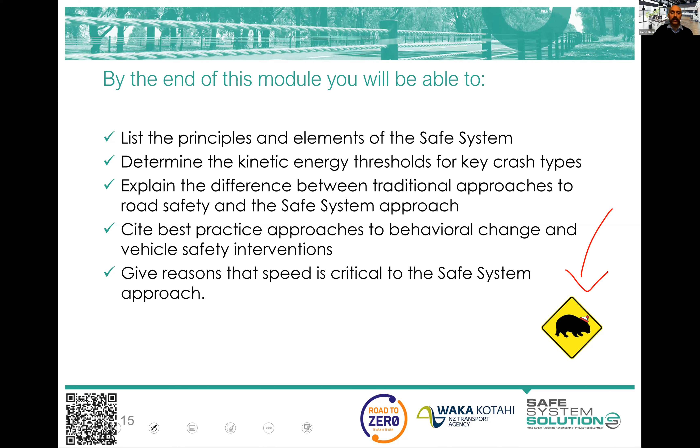Now, many of you know your Road to Zero document, New Zealand's Road Safety Strategy 2020 to 2030. And it's a really good document. It's been well thought through. It's certainly got some world-leading stuff in there. And I'm not going to go through it. That's not the point of this course. But I did want to pull out just a couple of things in the KPI section of this, which I've got a few things relevant to this course. KPIs are associated with this document.

Percentage of people who have completed an approved safe system training course and showed improved understanding of the safe system. So that's a wonderful start, considering this course does that. It is an approved course. But the next one is interesting, where it talks about the percentage of road infrastructure projects that have been subject to a road safety audit and or safe system assessment. Because I'm tipping quite a few of you are very familiar with road safety auditing. Some of you are road safety auditors and do road safety audits. Some of you commission road safety audits.

Safe system assessments are a newer methodology for assessing road safety and alignment with safe system principles. And there is some overlap between safe system assessments and road safety audits, certainly, but they are different things and they have different purposes and they produce different results. It's one of the most common questions or misunderstandings of a safe system assessment, that it is just a road safety audit rebranded. And that is certainly not the case. As I say, they're trying to achieve the same sort of end objective of reducing death and serious injury. However, they go about it very different ways. They produce very different outputs and they're used for different purposes.

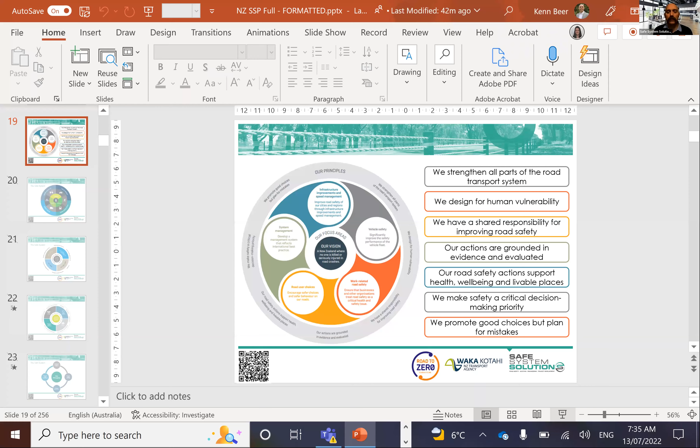Oh, wow. Okay, I see where we. Okay. Sorry, bear with me. So people ready to do their quiz? Absolutely. Wonderful. Okay. So if I just now reclaim this. And go back to here. Is that about where we were? It's coming. There it is. Great. Okay. So I'll continue on, and hopefully that lasts for a little bit longer this time.

I was just saying we promote good choices but plan for mistakes, which is that understanding of human fallibility. It's not to say we can't do better as humans in the road using task. It's just understanding our limitations as humans. Now, let me just jump out of the road space and jump into another industry, just to look at safety culture very briefly.

And if we look at widget production, like manufacturing something, making something, we saw back in the day there was a very pathological safety culture there, where it was a dangerous environment. People were told it was dangerous. They were given some training on how to use the machines or clean the machines or do their tasks. But they were just told, you have a responsibility to protect yourself. And that's what we refer to generally as a pathological safety culture in any sort of industry or any environment, where there is a dangerous system and its end responsibility is pushed to the individual.

You elevate from that to a reactive safety culture. And that's where in the widget production environment, the machines that keep killing people, crushing people, ripping arms off and the like are identified and the guards put on it, or a changed process is put in place. So it's a reactive safety culture. Then it elevates to this calculating safety culture. And that's where the economists get involved.

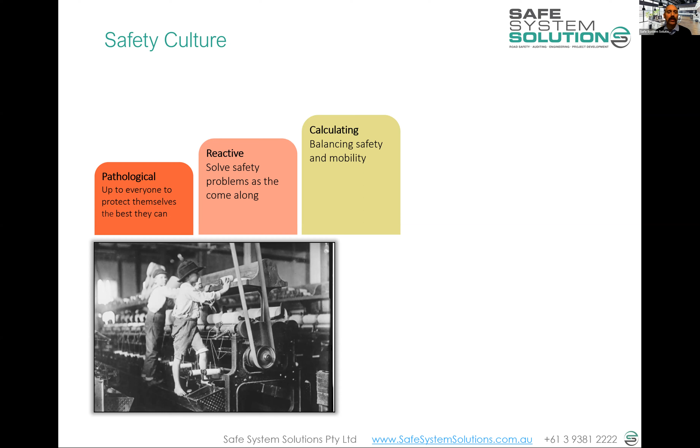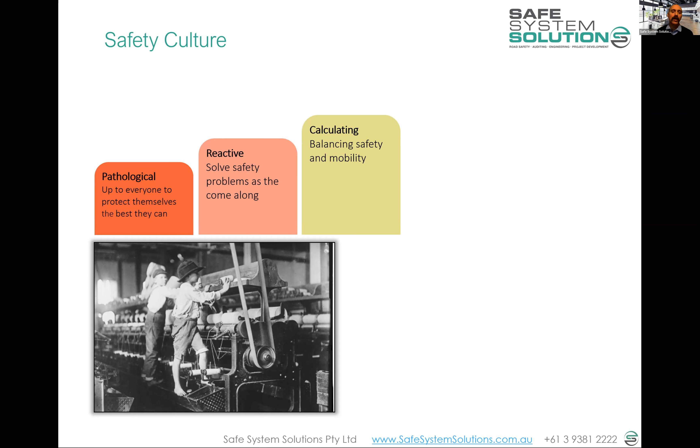And they start to say, sort of proactively and reactively, if we invested £30,000 in upgrades to safety of these machines and these areas and the loading docks and the like, we will actually see £90,000 in return in terms of increased widget production and less payouts to these families of crushed workers. And back then we came up with this thing called a benefit cost ratio, and you get a benefit cost ratio of 3. So every pound you invest, you get £3 in return for doing these safety improvements. And that's what we call a calculating safety culture.

But where we are moving to in the safe system safety culture is this proactive. And that's where you have to have a very high level of safety, and you can produce widgets up to whatever amount you can within that safety envelope. So the safety sets the precondition for widget production. And then you heavily need to invest in maintaining that safety culture. And that's not just maintaining machines and infrastructure, that's maintaining the actual culture itself.

So you've no doubt already aligned this to the road environment and road transport. And where do we sit? Well, we kind of straddle a few of these. We have very pathological elements to our road transport system where we know it's dangerous. We issue licenses to young people and we tell them it's their responsibility to be safe out there. And they have a responsibility, but we are pushing them out into a highly dangerous situation.

We do a lot of reactive stuff, addressing particular areas where crashes have occurred, death and serious injury have occurred. We calculate a lot. BCRs are very prevalent, and we do some exciting proactive stuff. And we're seeing some more emergence of proactive, and we want to see a lot more of that, where we're not waiting for crashes to happen. We understand risk, we understand biomechanics, we understand where crashes will occur in the future. We understand systemic risk, and we try to address that and then continue to try to maintain that culture and the infrastructure.

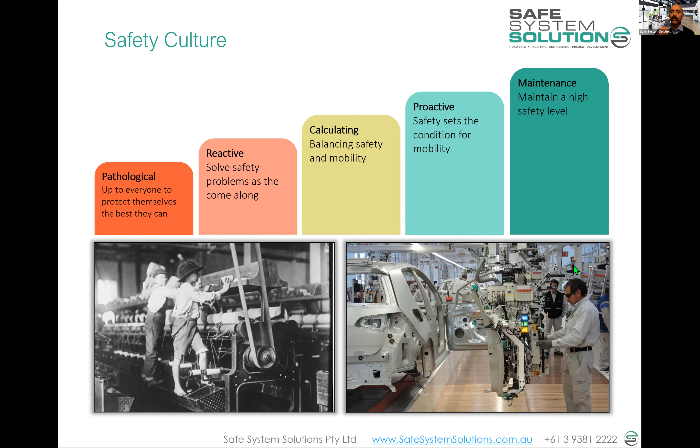I think it's time for a little quiz, Kathy, a little poll. Remember, people aren't being marked on this, but I wonder if we do have any polls loaded, or am I just going to ask it? People can type in. Oh no, look at that. It should have popped up on your screen, hopefully. Now, I've gone with these sort of generic key principles, and they're not worded in exactly the same way as we talked about in the New Zealand one, but it's a good discussion point. And the second question I haven't talked about at all, unless you've come to some of my other courses, the road safety audit course. I actually use it in a variety of courses, barrier design and a few other things. But have a go at those two questions. You're not being marked on them. We'll give you a minute. You can have a stretch as well if you want. We do have a bit longer break coming shortly. I don't want to spend too long on this, but let you have a look at that.

Will the next break be when you get the blue screen of death again, Kenn? I reckon we should schedule it in for there. It's a good time. Yeah. Wonder why we got the... I'll have to talk to our lovely IT person as to that one, because I don't think it was an internet issue. Bonus.

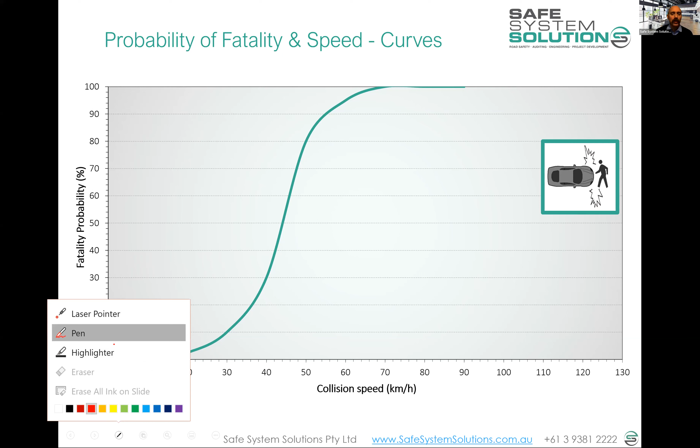So what are some of those sort of forces and speeds that we can handle? And you can see here a diagram of collision speed down the bottom. So that's the speed of impact. That is not the speed limit. Take that out of your mind for now. We're talking about the actual physics of this. So we've got a collision speed, and over here we've got the chance that collision will result in death to any member of our community. So this is based on whole population, and this is for a vehicle striking a pedestrian.

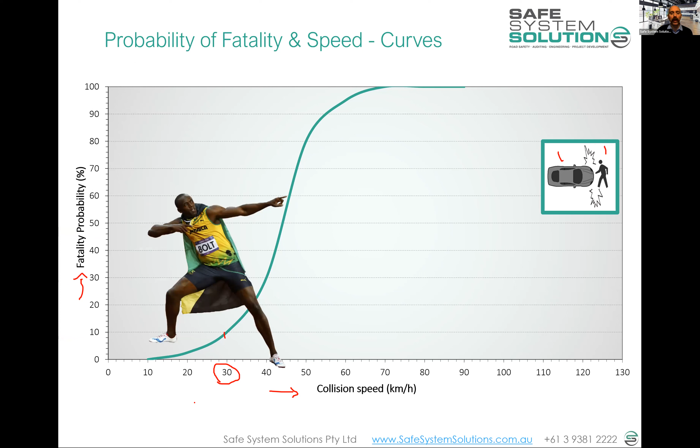And so we'll have old people in this. We'll have Usain Bolt type people. We'll have young people and everything like that. But you see there around that sort of 30 kilometer per hour mark is where things start to go really bad really quickly. Small increases after that become really quite bad. Usain Bolt is sort of up the curve because of his stature, his strength and the like, and his ability to withstand force, but we have that whole population there.

We have this information for other crash types, though, not just cars hitting pedestrians and cyclists and the like. We have it for others. Oh, of course, I don't know if this will stream, but just showing you the forces we are designed to handle. He broke a couple of ribs, but he came back and won the gold medal the next year. So, very recoverable and survivable. It's what we're designed for.

You can tell me later if that's streamed or not. You actually saw it.

Okay, so we have this for different crash types. And this, as I said, is a critical parameter for us in our thinking. We have this for right angle crashes. And this is where we have the speed of the bullet vehicle. And we call that the bullet vehicle in road safety. It's the vehicle that does the damage. It does the striking. This would be the target vehicle in a crash scenario down here.

This is the target vehicle. So bullet vehicle speed down the bottom, the collision speed, and the occupant of the target vehicle being the one that will be killed, and a driver side strike there or a passenger side.

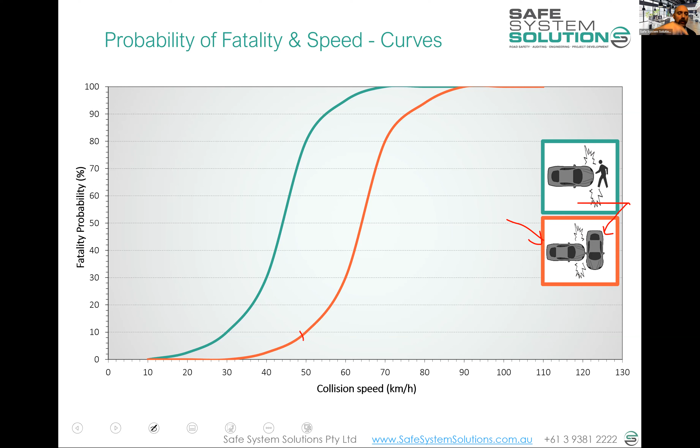And what we see there is the really critical point of kick up, the exponential point, is around that 50 kilometers per hour for bullet vehicle speed. And we have this for head-on crashes as well. And the critical point in the head-on crashes is around 70 kilometers per hour, which is 70 kilometers for each vehicle, the speed of each vehicle. So you'd have a closing speed, I suppose, in that scenario of 140 kilometers an hour.

But the actual crash forces on the occupant is a 70 kilometer per hour crash because, assuming same mass vehicle, same speed and a direct strike, the vehicle occupant goes from 70 kilometers per hour down to zero very quickly, and that's where the damage is done. It's the equivalent of running into a brick wall at 70 kilometers per hour.

So people have questioned the physics of that in past courses. So I did discover a Mythbusters episode where they did exactly that. They crashed cars into each other and then into brick walls and put accelerometers into the vehicles, as they do, in wonderfully spectacular fashion. So we could probably dig that out, or at least you could Google that and find it, no doubt.

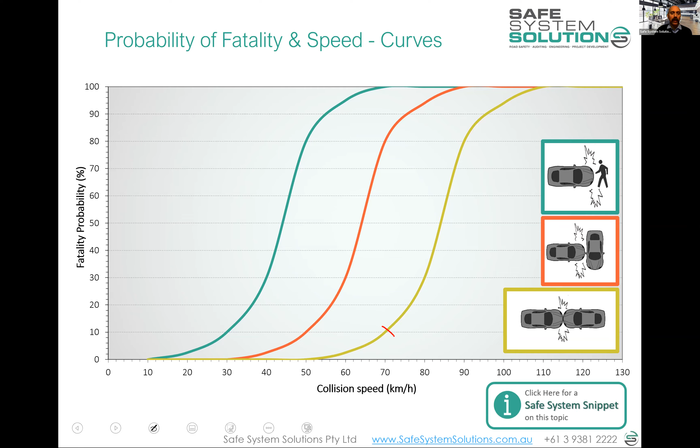So that becomes interesting. We're starting to build an understanding of crashes, forces, speeds, and these are becoming important parameters in our thinking. And of course, there are a huge number of crashes that can happen out there on the road network. So we just showed 3. This diagram we've produced, and I was doing the update to the Austroads Guide to Road Safety, Part 6, which is road safety audit, and I popped a variation of this diagram in there, because I think it's important that we start to get our head around this.

But we've started to do crash types, crash speed, and then a bit of a scale to show you the severity levels we're expecting from that crash type with different vehicles and the speeds. Now, in a safe system assessment, and we'll get to this in the 3rd module or so, you need to score the severity of a crash that you are predicting. So you've got to be able to look at an area or a design, predict a crash that will happen, think about the vehicles involved, the road users involved, the speeds, the angles that it'll happen at, and then you need to score it between 0 and 4.

And this is a bit of a guidance sheet for you to help you do that. So we will come back to this. We'll use it a lot. But I just want to show you a couple of things. One is that it's a spectrum. It's not a very hard line. We've tried to blur these because there is a blur in them.

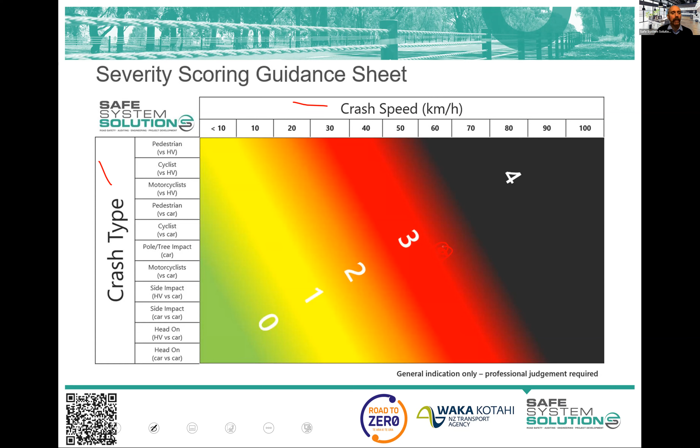Kathy, any questions for me at this stage before I jump onto this one? No, we had a calculation. Momentum equals weight times speed change. Human weight is less than a vehicle's weight, I think. I'm not good with my calculations.

Okay, I think I know where that might be going, and it's talking about the difference between a car hitting you and you hitting a car, which is fair. Yes, the specifics of the physics, and my analogy is there to give an image of this in something people can relate to. There are slight physics specifics to it. So well done. Give that person a prize for being a physicist in their spare time, or maybe that is their profession.

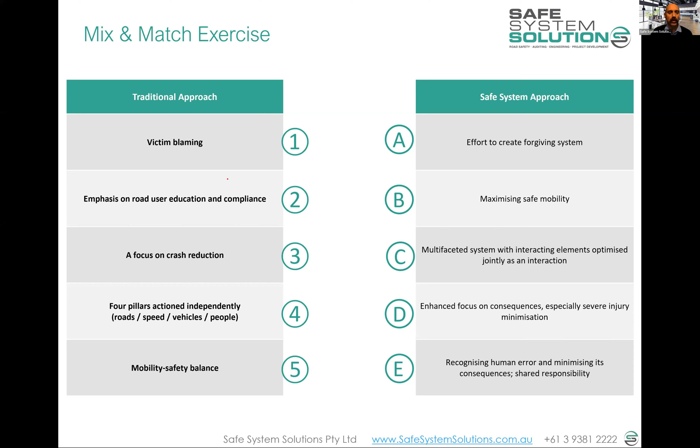Okay, let's have a quick look at this. I'm not going to spend long on it. Thank you for your input. As I say, a few of these could go to different places, so don't be too concerned if you maybe went another one. Kathy, maybe you can stop sharing that, and I'll do that on the screen because it'll be easier to follow. This was again taken from some Austroads work, so don't get too stressed.

So the idea of victim blaming, we don't want to be doing that anymore, looking for blame and then just saying, well, people need to not fall asleep when they drive or the like. We know looking at recognizing error, minimizing its consequence, and then having a more shared responsibility way of thinking about those issues. Emphasis on road user education and compliance is not to say we will ignore that. It's that effort to create that forgiving system is becoming more of a focus. We will continue to work on getting more out of the road user, but its limitations are there. So that one really could have gone to a few of those.

So the idea of crash reduction, to that enhanced focus on consequence, especially severe injury minimization, that goes back to what I said earlier on, is that it's not trying to eliminate all crashes. I mean, we would love to do that, but we just know that human error is part of what happens. So thinking about the physics of that.

So this idea of 4 pillars, actioned independently of roads and speeds and vehicles and people. Well, no, we're into a multifaceted system with interacting elements optimized jointly as an interaction. That's quite a mouthful of a statement. But it does indicate that these are not silos. They're not isolated things operating in their own entity. This is quite a system we're working with.

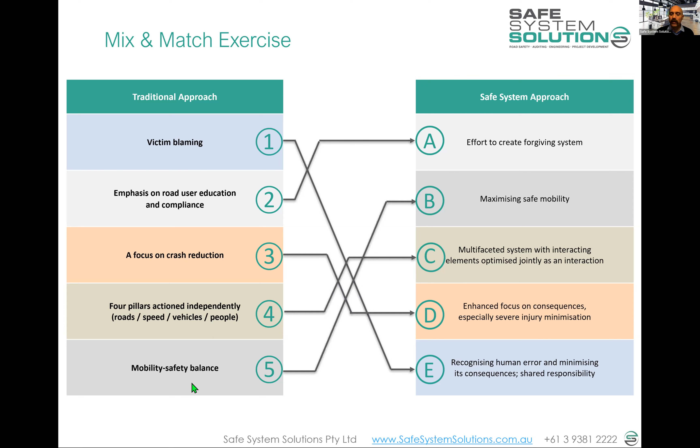And mobility safety balance, so getting that trade-off where you kill an acceptable number of New Zealanders and seriously injure an acceptable number to move things around, to say, well, no, we need safety, and we will move people and goods around within that safety envelope. It's not to say that the safe system is about stopping movement of people and goods, because, sure, we can have a safe system in New Zealand as long as nobody moves anywhere and no goods move anywhere. That's going to be very safe, but it defies the whole reason for a transport system. So we want a transport system that operates, and our objective is to ensure that happens in a safe manner.

I like the way Ian Cameron, who is a Western Australian actually, made this statement on a UN stage. We need a paradigm shift in road safety policy to stop the road death epidemic, and we need it now. It's unrealistic to expect that education and enforcement alone will bring the needed step change. Even road users who know and follow the rules make mistakes. A safe system creates an environment in which simple mistakes will no longer kill people or seriously injure people.

Education and enforcement tend to be the go-to for most people in road safety, and we know that they are elements of what can be done, but they're often the least effective in the way we do them. I'm not saying that we're going to reduce the amount of that or that it's not important. It just needs to be thought of in its particular way.

Let's do a little exercise here, and we'll jump into some infrastructure, and then we'll jump away from it again. This is a road that was getting a central barrier system job in a narrow flush median. You can see it there. Just a newly constructed photo here, and you're seeing some of this roll out in New Zealand now, so you'll be quite familiar with it if you're out and about in the regional network.

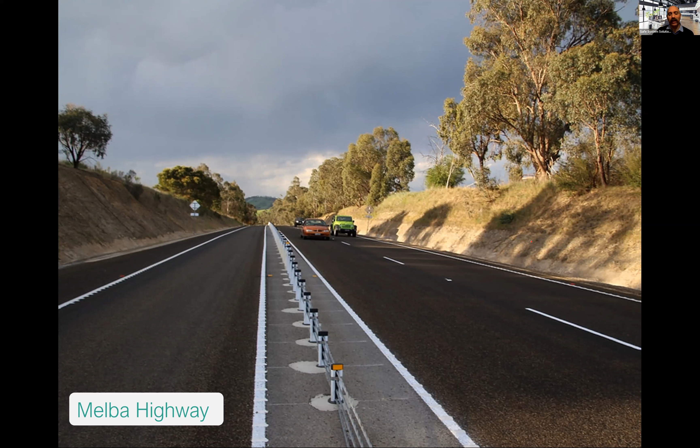We need to do stuff that is different to the way we've always been doing stuff out there on the road network in order for us to make significant gains in our road safety objectives. Sometimes it's just we need more money and we need more contractors and we need more resources just to get stuff out there we know works. But sometimes we need to innovate. And road safety audits play an important role in innovation and risk management, but they're not going to help us in that sense of getting things through the way a safe system assessment does.

So that's more of the job. That one got hit. Of course it got hit. I mean, some of the blockers were the maintenance people saying, well, it's going to get hit all the time. We have to maintain it. We've got occupational health and safety issues in maintaining it. How do we maintain the pavement next to it? We can't contraflow vehicles. What's happening? These are all things that we need to work through, and we need to come up with ways to address those and ensure that these things can happen safely. And they're very important. However, we need to remember the importance of it.

And this one, when it got hit, one of the people involved in the crash called the region just to say thank you for putting the barrier system in, which is pretty rare in our space, isn't it? That somebody just wants to say, hey, thanks for that. It probably saved my life because somebody came directly at me and the barrier was there. Anyway, they created a little video of this. So that's in the learning management system in the little resources section. It's just a 2-minute video, but to me, it's a really powerful one to talk about the way that infrastructure can

create this safe system. Because somebody fell asleep, they made a mistake. They left the road, they went straight at another vehicle, and the system stepped in. So the mistake happened, okay? And these are not bad people making these mistakes, right? They've made a poor judgment call in driving after a long weekend or whatever it was.

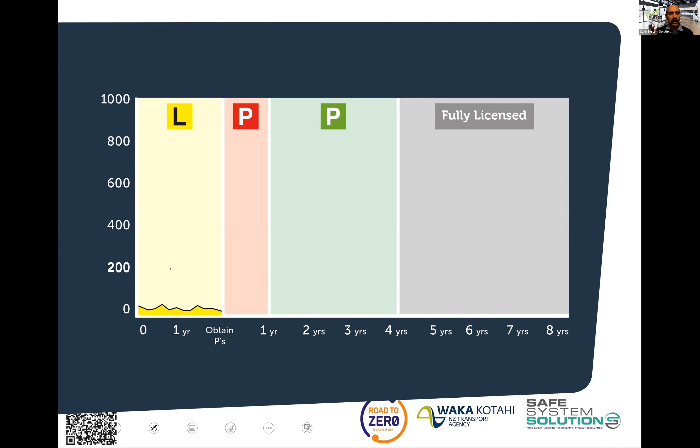And just quickly putting this one up, this is a New South Wales study on graduated licensing, but it's fairly applicable overall. So in a learner phase with a supervising driver next to the young driver, we see very low numbers of death and serious injury. And this is both by raw numbers, but also by vehicle kilometres travelled. So the actual standardised risk across. As soon as they're out there on their own, the death and serious injury rates just skyrocket. And then they come down over time.

They pretty much flatten out after this. But from what we discussed, there's a few important things to note about this, but one actually that I like as an interesting takeaway: we pretty much never get back to as safe as somebody with no experience. I mean, isn't that fascinating?

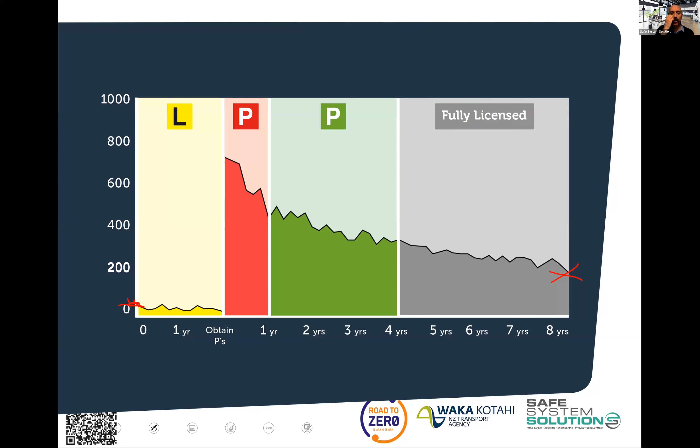Anybody who tells you it's about being a supercar driver, or if everybody could drive like Michael Schumacher the roads would be completely safe, it's just not true. I mean, you need a basic level of ability to sort of use the road system. Well, actually, you don't need that. I mean, you do. There's self-imposed risk management happening back here. But generally, it's not about having super skills. It's about the system and the way it's used.

Incentivizing people to drive safely actually can be quite effective, and I think it's an underutilized factor in road safety. Essentially just pay people to be safer in one way or another. It's hard to do it that way, but giving them free license renewals if they have no demerit points or no fines is actually quite an effective mechanism. Advertising that specific behaviour, not just drive safely, but take a break every 2 hours or do this specific thing rather than...

The way we talk to young males especially is very challenging, and they're usually our primary target market in road safety. But comedy seems to be extremely effective in recall for that target audience, actually generally for everybody, and does lead to change in action. It's hard to do these evaluations, but it's pretty impressive. And New Zealand has twigged onto this very much better than almost anybody in the world. Some of your road safety advertising campaigns are just world class.

I love them. In fact, we popped a few into the learning management system, which I think are just brilliant, and some others from around Australia and New Zealand that have some really exciting elements to them. I'm not going to dwell on that. And there's other ones which are really interesting now, talking about some of the elements and the principles of the Safe System in different ways.

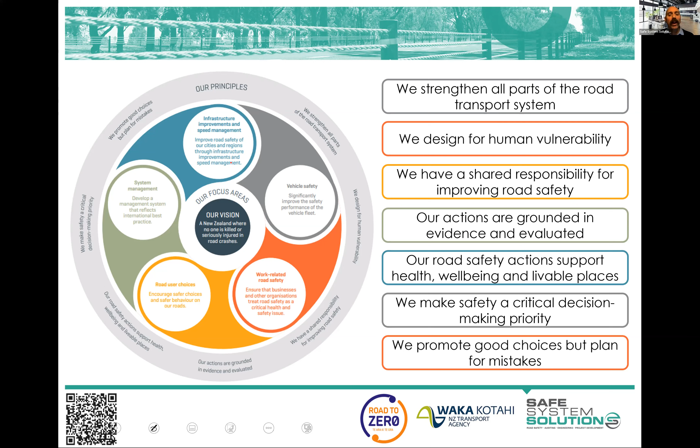I will keep ticking along here, and we've got the vehicles, and they provide a wonderful frontier for us to improve safety. We've got all the different safety features coming into the vehicle, which are really exciting. We see star ratings of vehicles and improvements. We're seeing lots of different testing. We're seeing pedestrian testing now as part of the star rating of vehicles, where not only are we trying to protect the occupants of the vehicles, but also those being struck by the vehicles. So airbags popping out over the bonnet of the car, or pop-up bonnets, are now pretty much standard features of new vehicles. So there's exciting stuff, but there are significant limitations in the vehicle currently.

Frontal impact, we're seeing quite good stuff. Side impact, as I showed just back here. The ANCAP test for a side impact of a vehicle is 32 kilometers an hour. So that's saying, for a 5-star vehicle for side impact, if you crash into a pole or a tree at under 32 kilometers an hour, we're pretty confident you won't get an acquired brain injury or be killed. Above that, probably unsure, and higher than that, you're probably going to get an acquired brain injury or be killed. So you can see the lack of ability in the physics to absorb those forces at a point source on the side of the vehicle is pretty significant. So we do have a lot of work to do in that space.

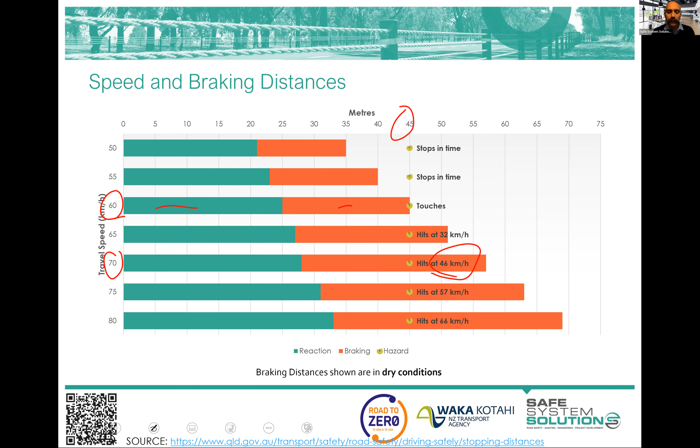In fact, we know that it is a power relationship, and it's a fourth power relationship for fatal, and a third power relationship for serious injuries. So if you cast your mind back to your maths, this means that small changes in speed have significant changes in fatal crash outcomes, significant with serious injury, not quite as significant as fatal, and it comes sort of down with that.

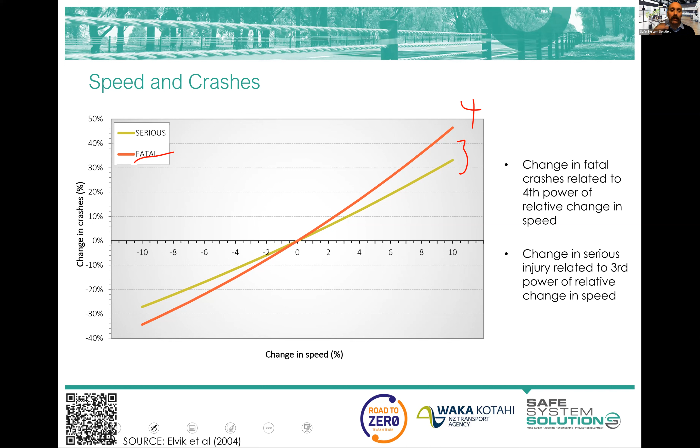But if we can make changes to speed, we're going to get our biggest benefit in reduction in fatals, reduction in serious injuries, and other injuries. So it's really hugely powerful for us to manage speed. The community just is so invested in speed when it comes to speed limits, though, aren't they?

And, you know, I've got in here some research which I'm always fascinated by, communities' insights into speed limits. I used to manage speed limits for Victoria for quite a few years, and I'd constantly be monitoring public sentiment on speed limits and what they think and how you differently message things and try and delve into that. So anybody who's working in that space, I can point you at some really fascinating stuff.

But half the population doesn't think that reducing speed limits would reduce crashes. Now, this tends to be the same across most jurisdictions. You get a bit of variance, but females are better than males in this one, definitely, understanding that. But they can understand basic physics, usually, that the severity of crash will come down with lower speeds.

So that's interesting. And when I was updating the Austroads Guide to Road Safety Part 3, which is speed limits and speed management, I popped this diagram in just as a reminder that no matter what vehicles you've got and what road you've got and what road users you've got, if you filter it through an appropriate speed, you have a safe road transport system. Now, that's easy to draw a diagram of. It's very hard to do in practical reality, but it's a reminder of that amazingly important thing within our road safety space.

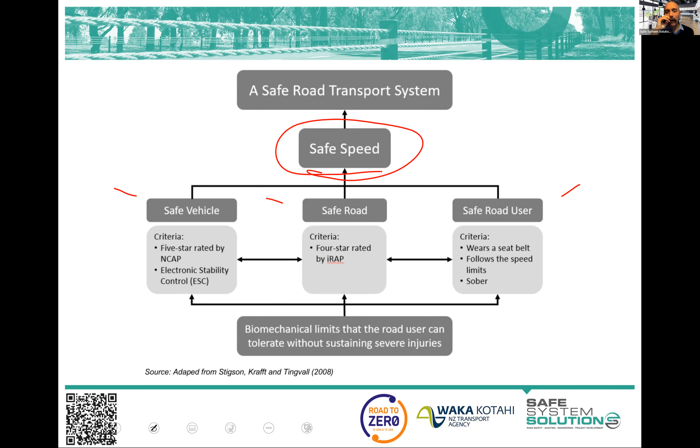But don't think that it's just speed limits. The infrastructure, as many of you know, can be a wonderful tool in managing speed. Getting people to drive at appropriate speeds because they want to is far better than us putting a red circle around a black number and telling them to drive at that. They get really angry at that.

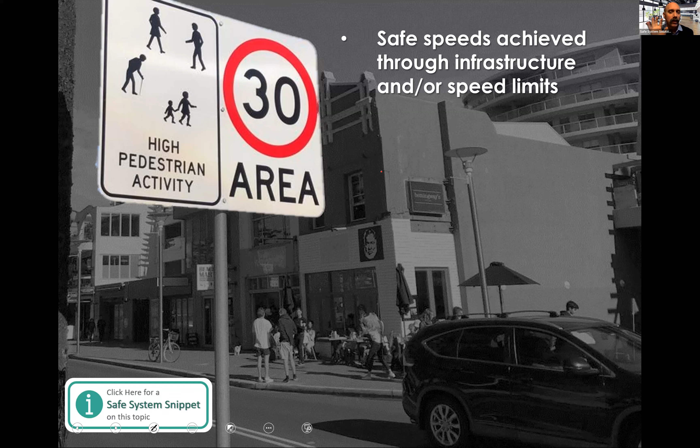But if they decide, because there's a raised intersection or a roundabout or a speed hump or traffic calming there, to go slower, they don't make that connection to government intervention in speed management. It's their choice. So that's far more effective if you can do it. It often costs a lot more.

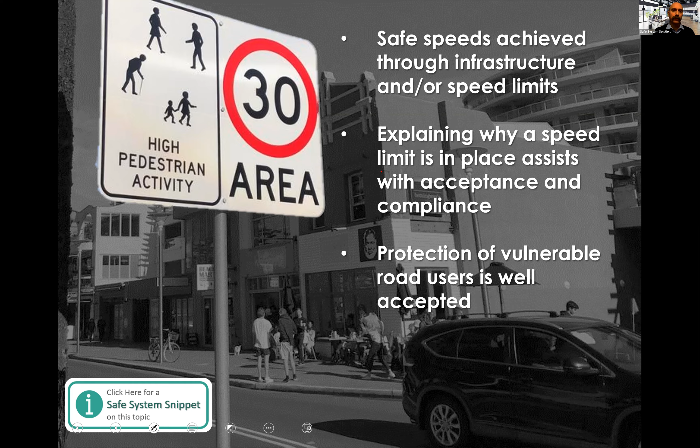Explaining why speed limits are in place can increase acceptance and compliance. And generally, the protection of vulnerable road users is well accepted, especially in urban areas. So that can be a lever for us to get more compliance and acceptance. I'll jump on from that.

It's super complicated, and we'll delve into it more, but speed and the management of speed are so critical in our road safety. I've got mountains of reports and research and papers and different trials and things that have happened out there. So as I say, I'm happy to share and talk further to anybody on that.

But risk has traditionally, in fact always, been talked about as the chance of something happening and how bad it's going to be. That's financial risk, environmental risk,